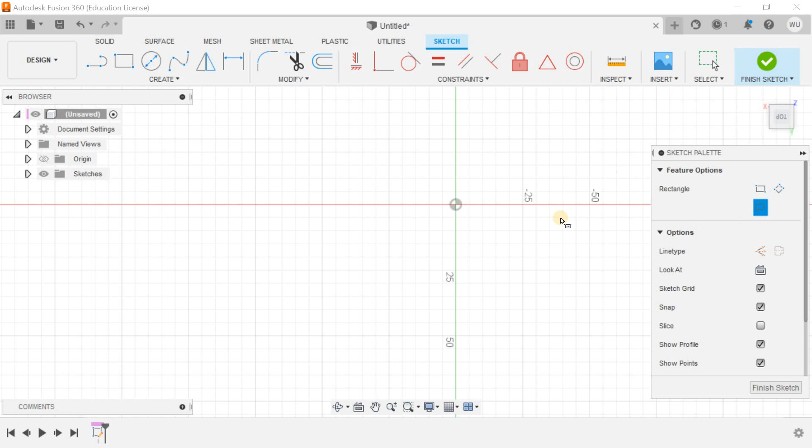I want to go for the sketch and choose this top surface. I want to go for a rectangle and try out the center point rectangle. This is 120, press tab and define 60, hit enter. I want to finish the sketch right now.

Automatically it converts into an isometric view. Now if you go for the extrude, most probably extrude in case of sheet metal is used for cutout sections where you need to create some blanks inside the sheet metal, to remove certain sections.

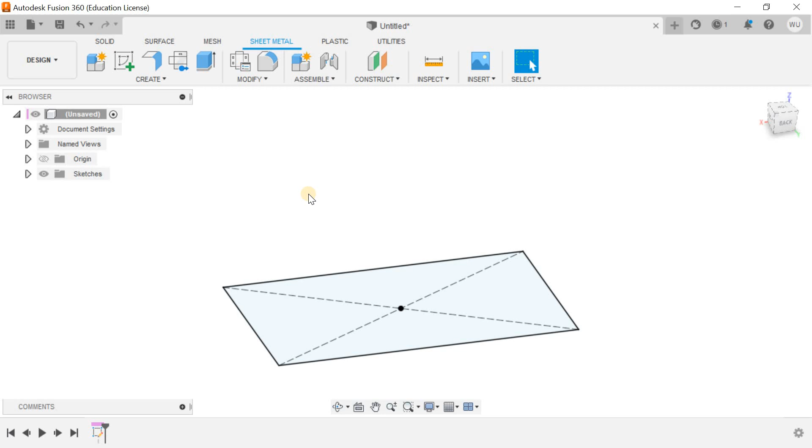While you want to extrude any section as a sheet metal, probably you need to go for the flange, whether you're going to make the base flange or the additional walls.

Let's go for the flange, and I'm going to select this, and automatically it detects the walls. You can go side 1, side 2, and keep it as center. I'm keeping it one side, upward, and it is still in millimeters.

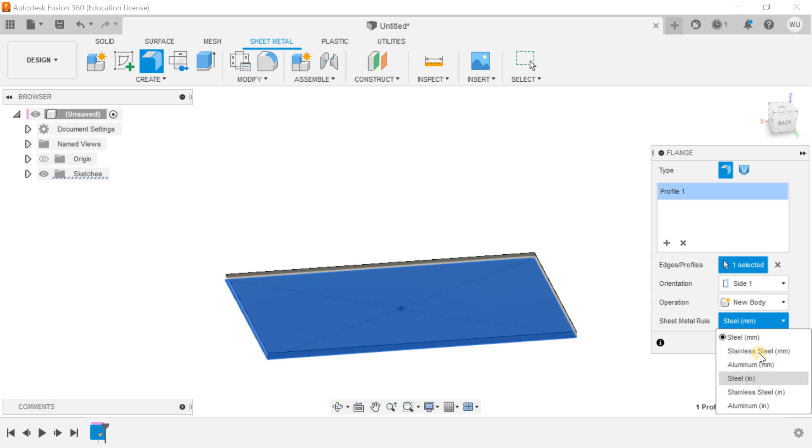You can just change the material of the part you want to create as the sheet metal.

Right, so the base flange is ready right now. Next, what I can do is create the additional walls.

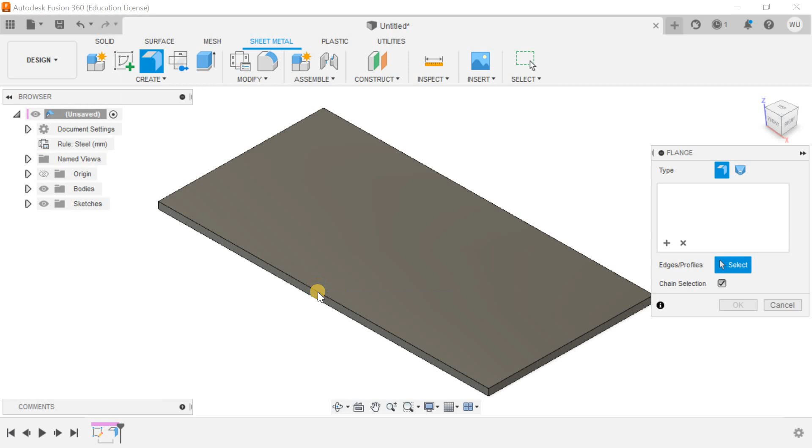Again, I'm going to go for the flange. By choosing and selecting any of the edges, if you want to create an upward edge, select the upward edge; if you want downward, select the downward one. For now, I'll create the upward flange like this by defining the height 50.

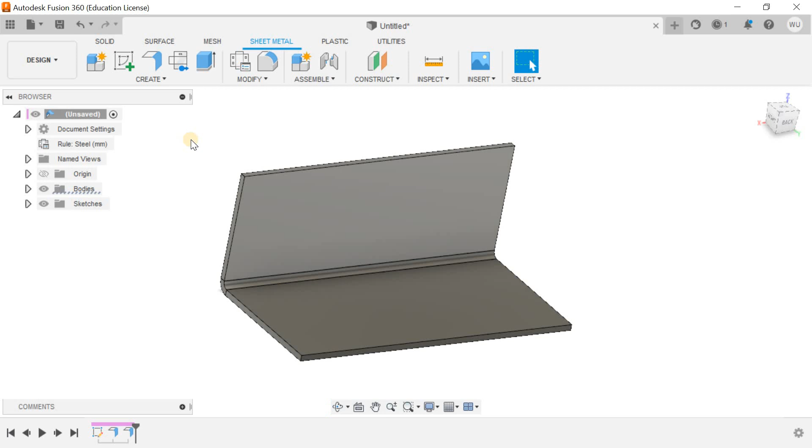You just want to rotate your object by pressing the middle mouse button and rotating your mouse, and then go for this side too. See, and this time you can just create this type of flange right now.

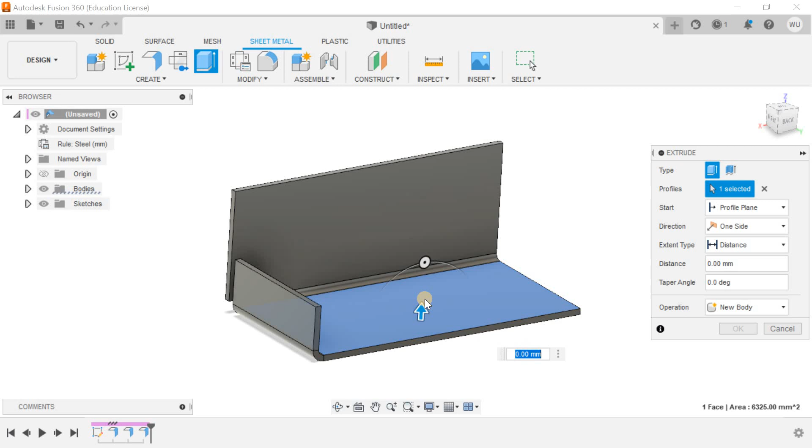As I mentioned, whether you go for extrude, you want to create certain sections to extrude too, like this. You can make it thicken.

But what you can do if you want to create a cutout section, for example, I just want to create a circular cutout like this, and go for extrude. I select this, drop it down, and it will automatically take the cut section like this.

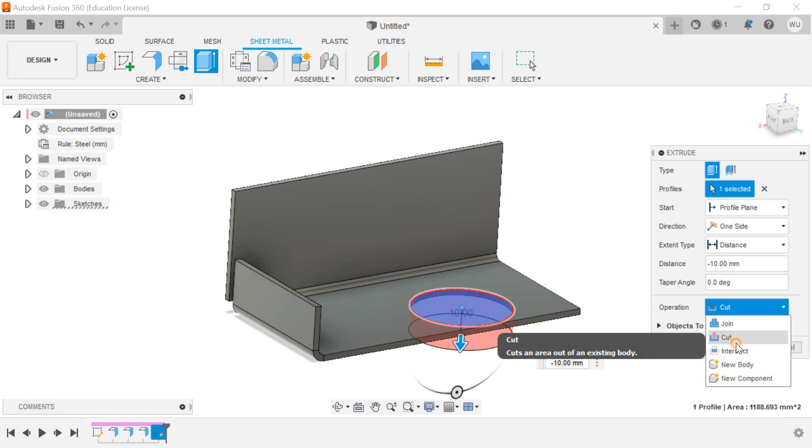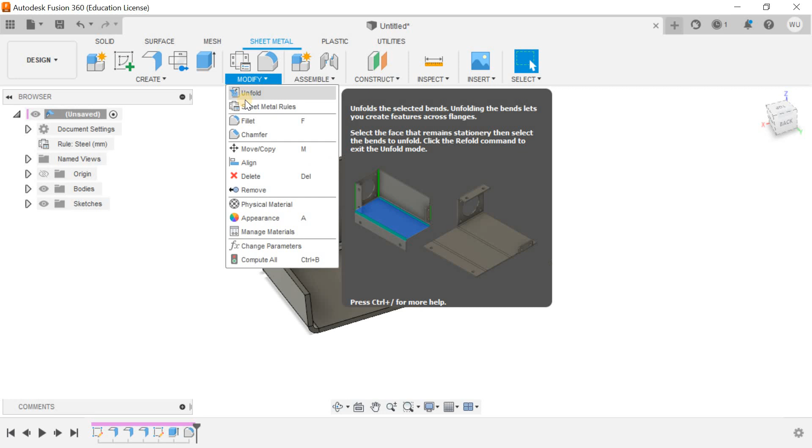Next, let me apply some fillets at the top of the edges, like this, say 12, enter. And right now you want to create a chain for this side, choose this edge, define it 12, and hit OK.

So this is how you can play around with different kinds of parametric modeling tools while designing your sheet metal parts.

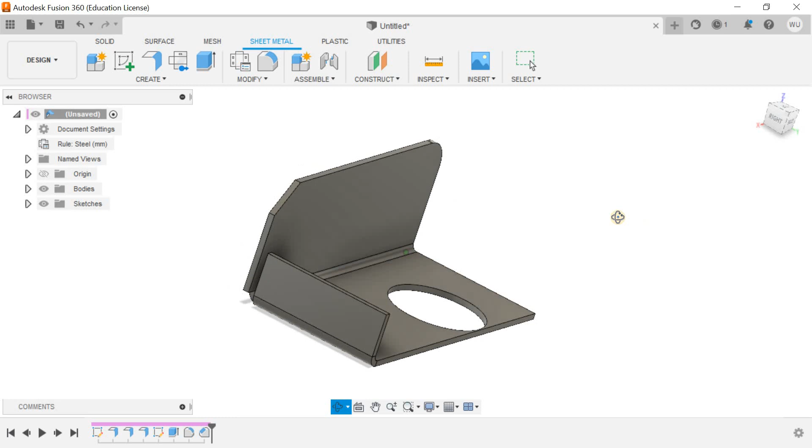So this is how you can do lots of things, as I told you earlier, whether you want to create an extrude section, same on top of this -- for example, you just need a section like this, and I want to extrude it up to 3 mm, and hit OK.

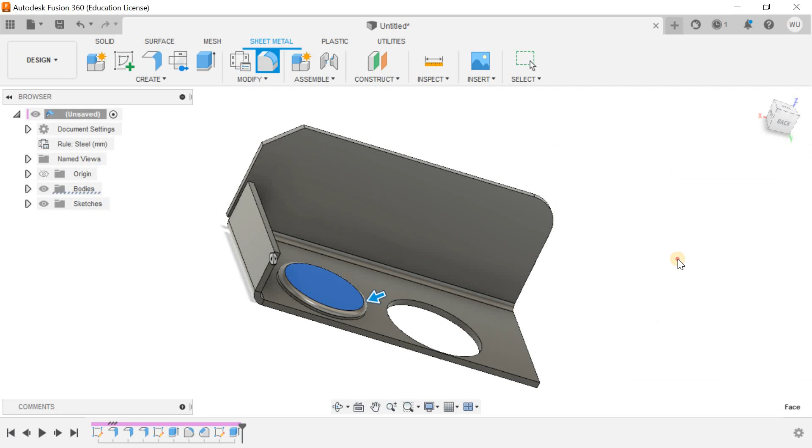Again, you can go for the fillet, choose this top surface, select 2, hit OK, and again go for this edge, select 2, and hit OK.

That's fine for me, and let me navigate to the shell feature. I'm going to go for solid and modify, and go for the shell.